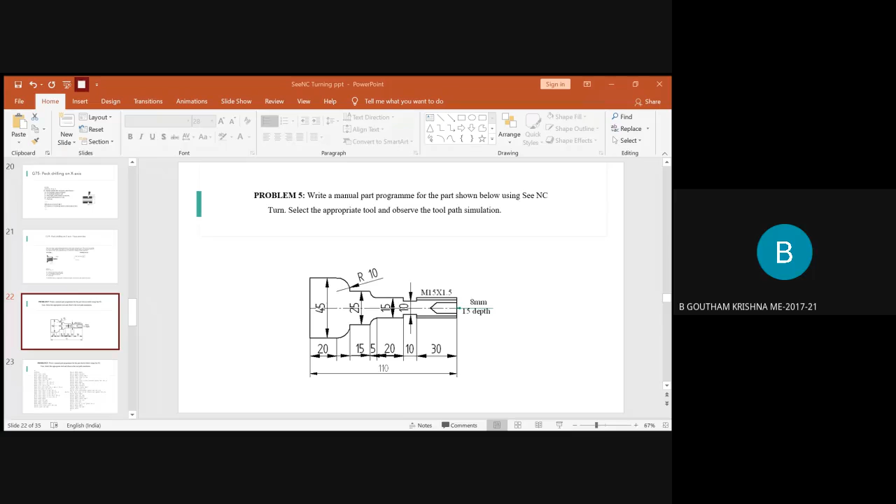So today we are dealing with program 5, where you'll be writing a manual part program for the given part. So you are aware until now of linear interpolation, circular interpolation, the turning operation and finishing. Apart from that, what is the extra operation you can find in the figure? Can anyone let me know which are the extra operations visible in the sketch? What is this part and this part? What do you mean by this?

You have done this using a lathe machine, right? Lathe operations, all types of operations you have done. So what does this indicate? Anyone in the class, please? You should respond. You cannot be idle like this.

So in this part program, apart from the turning operation, we have done the grooving operation already in the previous problem, right? That was radial grooving. Along with radial grooving, here you will have axial grooving and thread cutting. It is an external thread cutting we'll be doing. So basically you have a normal rough turning operation, a smooth finishing operation, the groove cutting as well as the thread cutting. Accordingly, you have to select all these tools before you start the simulation in SeeNC Turn software.

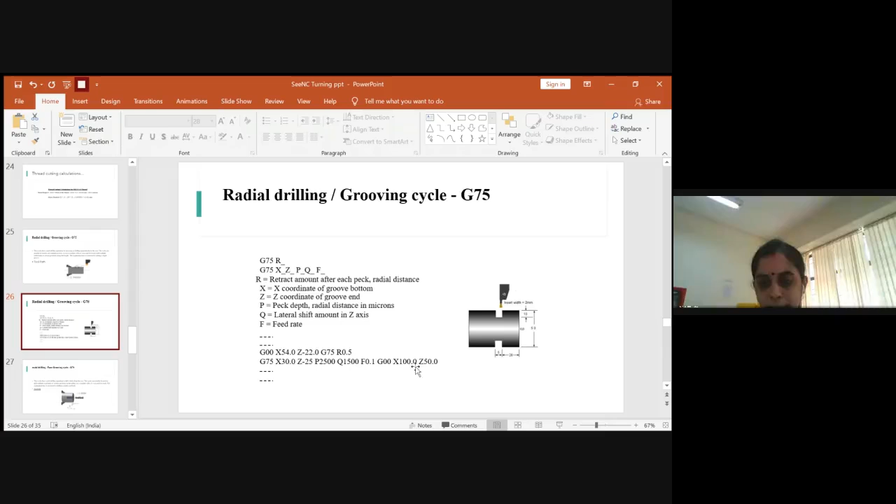And then what does the syntax tell for Q? Q is the lateral shift in the z-axis, until where you need it, the z-axis value in mm. So you have to go back to the diagram and see. Just a second. Yeah, Q is the lateral shift in the z-axis. In the example, the Q value has been given as 1500. And similarly, in our problem, the value of Q will be 800 microns.

And here for the axial groove cutting, there won't be any radius required, but you have to assign R equal to 0 by default, or else it shows a syntax error. So you will just show R equal to 0 and assign the feed rate. Once you assign the feed rate, the grooving cycle is completed.

So it starts grooving as per the required dimension, and this grooving part will be completed. Once this grooving part is completed, again we have to make the spindle off and the coolant off. Once this is off, we have to send the tool again to its home position. So you will write G28, U0 and W0, which will send the tool to its home position away from the blank.

After that, again, you need to change the tool. Why? Because the axial groove cutting and the thread cutting is still pending, right? So now you will select tool 4. For that, you have to write M06 and assign tool number 4, offset number 4. Once the tool has been set, make the spindle on, assign the value for the spindle, and make the coolant on. Once this is done, again you use rapid traverse and bring the tool nearer to the blank where the operation has to be done.

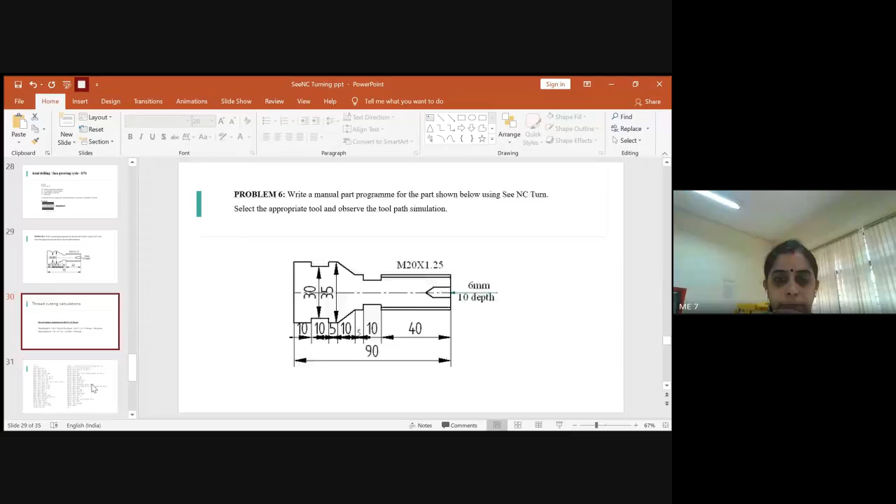G76. This was discussed earlier. Yeah, I had written it here somewhere. Okay, let me see. Yeah, written at the end, right?

So the thread cutting cycle is represented by the code G76. It will have the thread depth, the depth of the first cut and how it could be cut. With respect to the depth of cut, you can calculate equal parts of the area with respect to the tool tip. That is okay. We will focus mainly on the syntax here.

So G76 has a syntax in this way. G76, after that you write the letter P, and in brackets M, R and A. This entire combination assigns the value of P. Later you have the word Q, and then you have R. So what does each stand for? In P you have three terms: M, R and A.

So what is M? It is the number of idle passes after each cut. Suppose you need 2 idle passes after each thread cut; then it will just make an idle pass twice before starting the next cut, right? So you assign the number of idle passes you need.

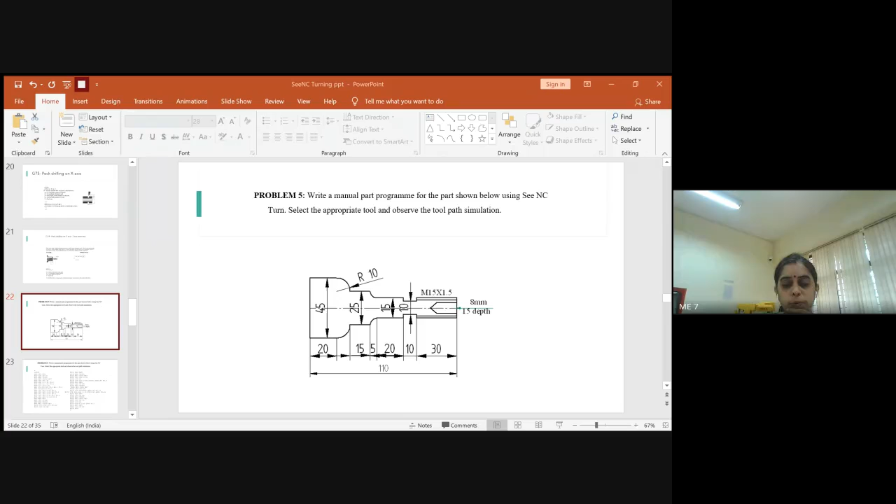Hello. Kindly respond. Are you people there?

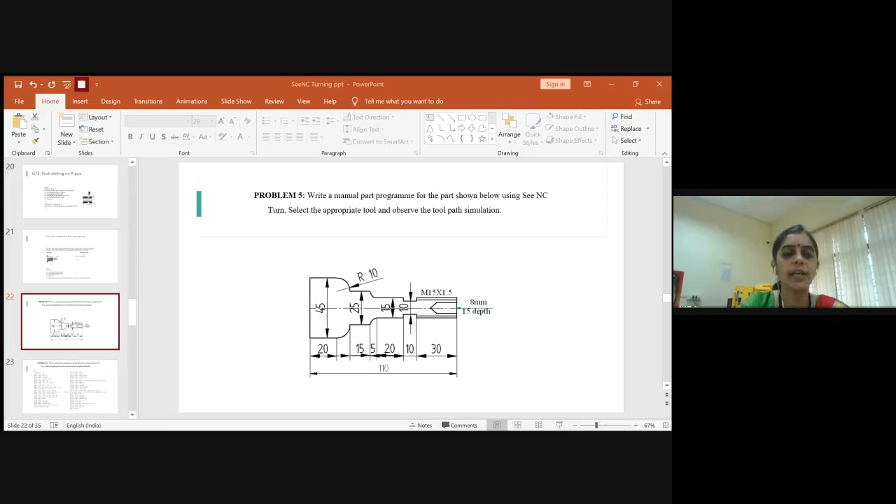Yes, ma'am. Yeah. So now let us just start up with a video to see the simulation in the SeeNC Turn. I'll just stop the slide and start up with a video. Just 2 seconds.

Ma'am, can we directly write in the record, ma'am, or do we have to write in observation as well? Observation, just make a rough sketch because you were supposed to maintain observation as well as a record. Ma'am, please, ma'am. Already we wrote so much and then later you are telling us to write record again. We have to repeat the same thing again. No, ma'am. Please, ma'am. Yeah, see, record you have the marks, right? And when you were coming into the practicals, were you not maintaining an observation work? Ma'am, observation we used to write only some certain stuff, ma'am. But now again, if we repeat the full thing over again, no, ma'am. That's why it's double the work. Now, ma'am, whatever we've written again, we have to write in the record.

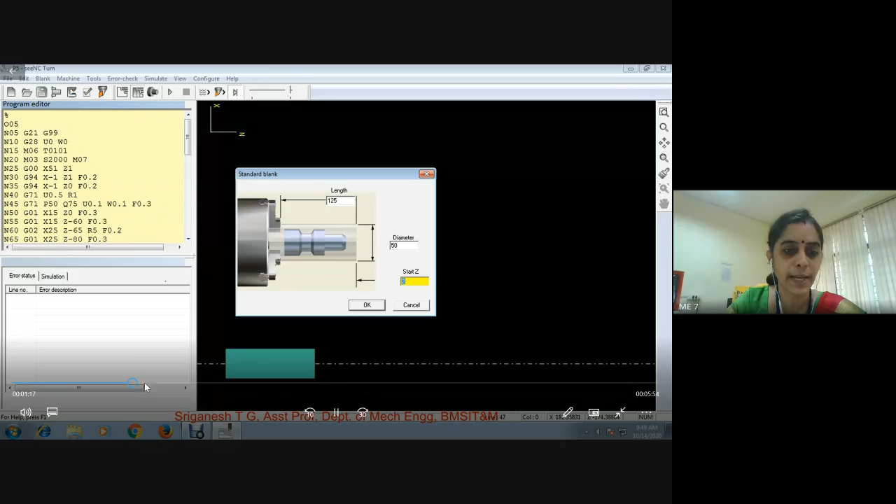So first we will select it and then we will select the machine also. For the operation, please select the machine. I think that is done here. Yeah, the blank is done. And you have to select the machine as Fanuc. Then you will go for checking the error. If there is any error, it shows there is an error, or else you can directly go for the selection of the tool. Here already the tool is selected, right? So please remove all the tools and add on as per the requirement.

So delete the existing tool in the tool library. Then you configure your own tool numbers. You need first the rough turning operation. Select the rough turning operation with the radius of 0.8. This is done for rough turning. Then you go for smooth turning operation, right? Then you go with the nose radius of 0.2 for smooth turning operation. This is done. We usually select these two. Then we go for tool number 3.

Tool number 3 will provide you for the groove cutting. It is in metric unit. So you will select the groove cutting tool as per the depth of cut which is needed, right? It will be in the database. If you need any changes with respect to the depth of cut, you can change, right? Initially here, this tool is feasible to have 8 mm depth. Our requirement is also 8 mm. So we have assigned the same tool for groove cutting operation.

Then you go for tool number 4, right? It provides you for external thread cutting. And in external thread cutting operation, we always go with a threading angle of 60, right?

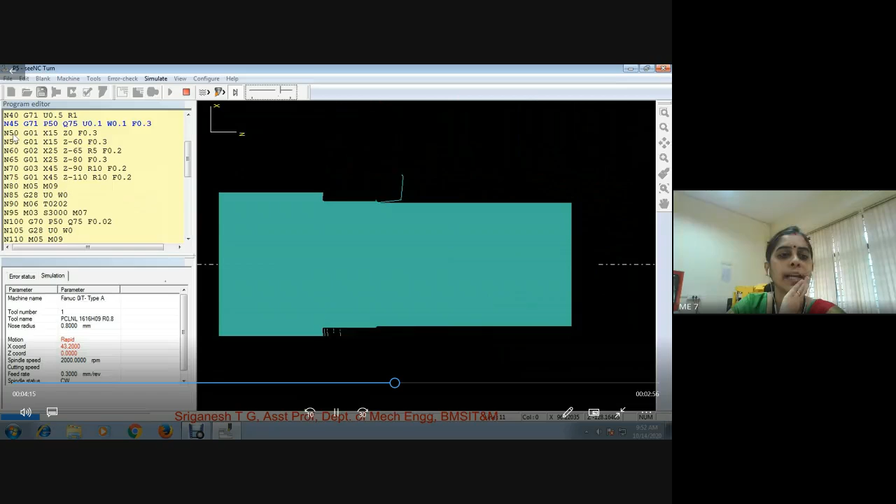So then you will start simulating, you will get a blank, right? It will be zoomed out. Just draw a box, it will get zoomed. Okay, so then you can start doing the simulating part. Check the start simulate. Since you take G94, it does the facing operation initially. Then it starts with a rough turning operation. Right from sequence number N50 to N75, the rough turning operation will be done.

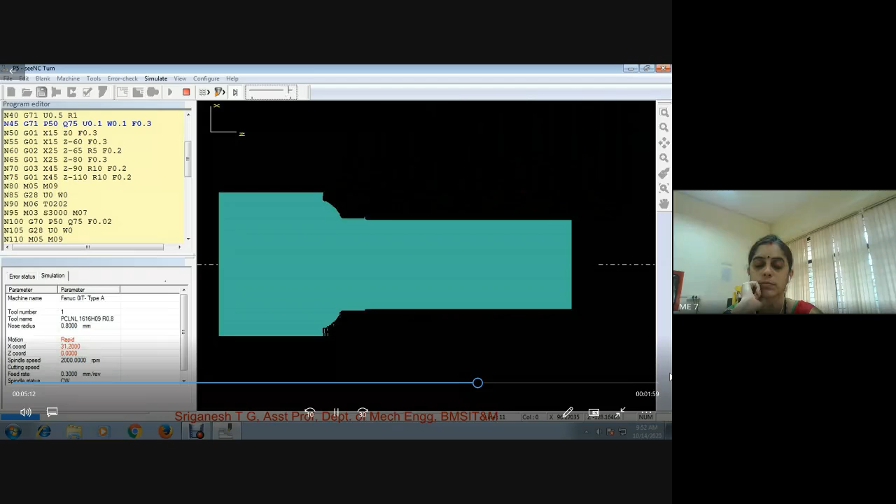So you can gradually observe how the rough turning operation for all the sequence numbers is taking place.

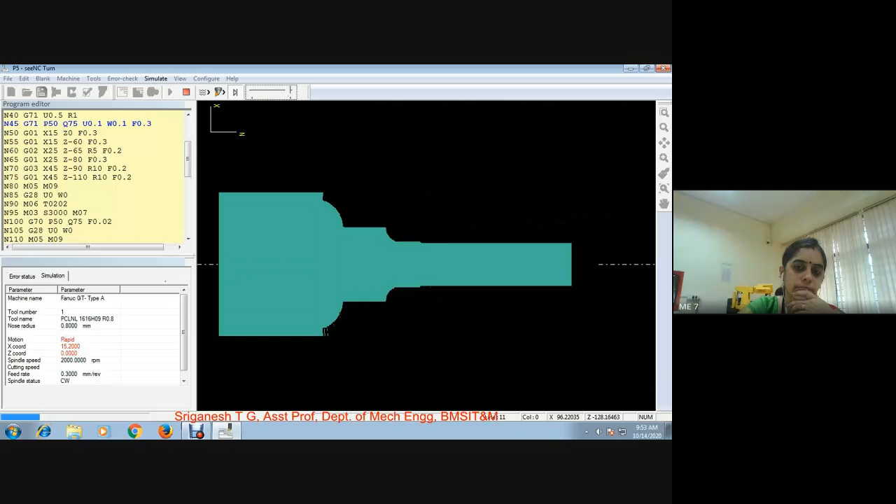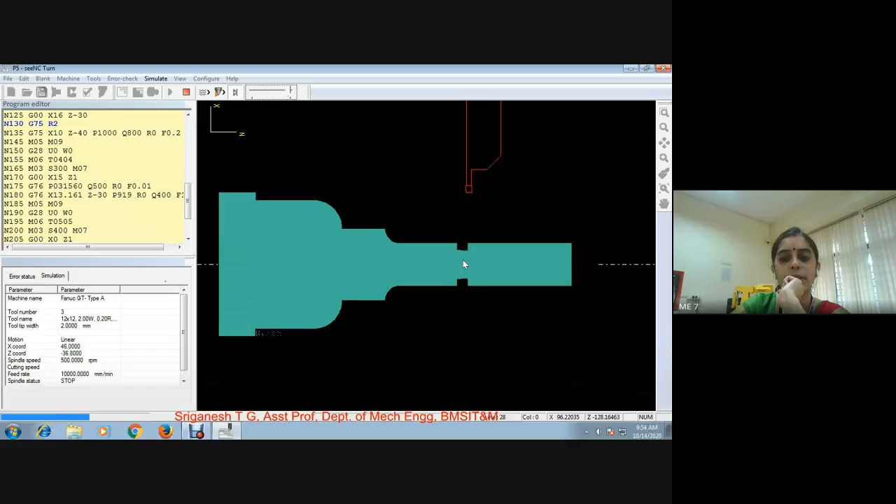So the tool will be set to its home position. The tool gets changed, and now it's starting with the radial groove cutting operation, right? You can observe as per the diagram I showed you before. So as per that, the groove cutting operation will now be done, where the value of X is 10 and it has to move Z to minus 40. So from here it will go exactly to minus 40.

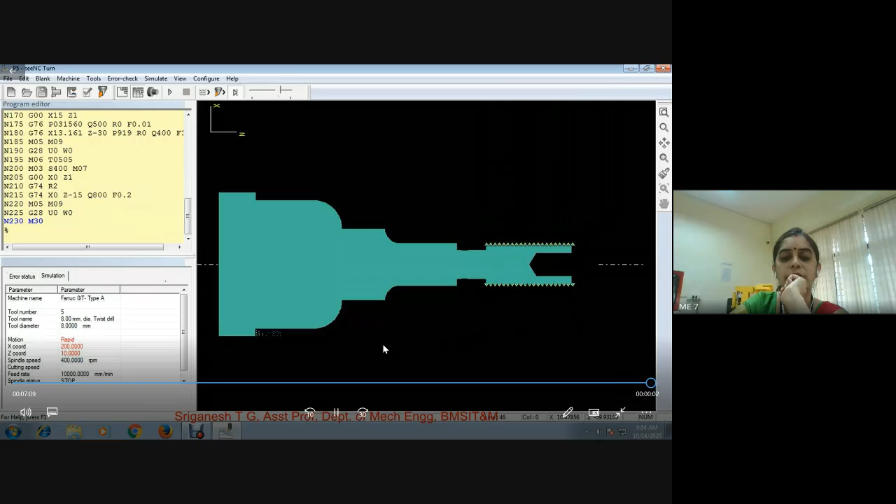So now the thread cutting operation is completed, and now it is starting with the radial groove cutting operation. Sorry, the axial groove cutting operation. And once it's completed, it ends. So this is how the operation will be performed with respect to 5 types: turning, smooth turning, rough turning, thread cutting, radial grooving, and axial grooving. So this is about program number 5.

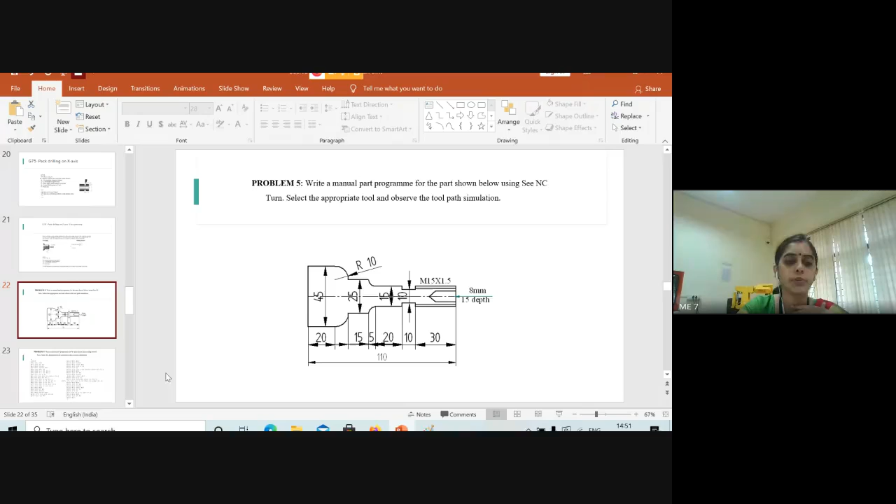So please write down the question and take a snapshot of the sketch. You have to write this in the sketchbook, and the program. In the manual we have shared, there are still some minor errors. Okay, so this is the corrected version of it I'm showing you in the PPT. Please take this down as well. The edited manual will be shared with you all at the earliest. You can refer to my PPT slides for your reference. I can share this PPT also. Please take the question number, the sketch.

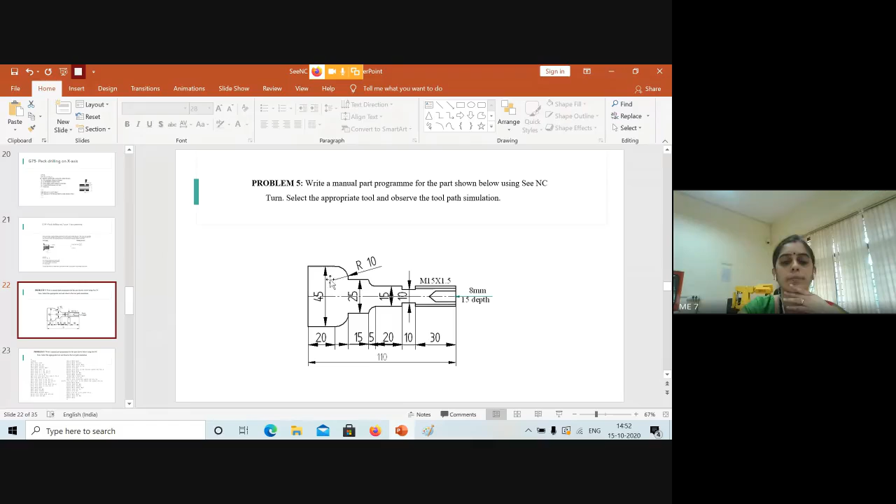Have you taken it out? Hello? Is it done? Kindly respond. Yes, ma'am, done. Yeah. So shall I go on with the next program explanation? Ma'am, next program, ma'am. Yeah. We're doing 2 programs today, ma'am. Yeah. What? Any problem you have? No, ma'am, it's confirming. Okay.

Or else I will assign one work to you all. I have explained all the programs, so this is also similar. You will write the program for this by yourself and post it for me in the Google Classroom. Okay, so please do this, since from program number 1 to 5 I have explained each and every program. This is not any different. It includes all the operations I have explained to you until now. So kindly write a part program and upload it to me by today. Only then I'll take the attendance. Please take the sketch.

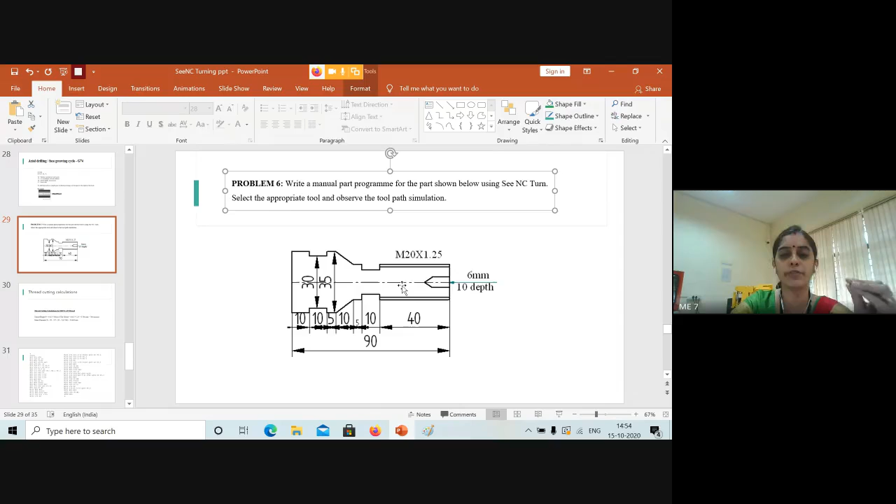Then only you will realize how and when to use the syntax properly. Right? So please open your book, take down problem number 6, take the sketch, start writing and post me. I will just create an assignment for program 6. Just upload the program. Don't look anywhere. Write by yourself. And then for cross-checking, I can show you the program here.

Okay? Please do this work. That will help you to have a better understanding. I will keep this slide open. Look at the sketch. Start writing the program. The thread calculation, if you need the values, I'll show here. The same calculation we did for the previous one. Take down the sketch.

I will create a post here in the assignment in the Google Classroom. Let me see who will post me first. Be quick. I'll just assign it in the Google Classroom.

Please don't copy. Use your own mind and write it down. You will really feel happy when you have done it at least once without seeing. If you do it once, you can write any program by yourself. It includes all the operations. Try to write it down. I will just create a Google Classroom assignment for it. Did you people start writing?